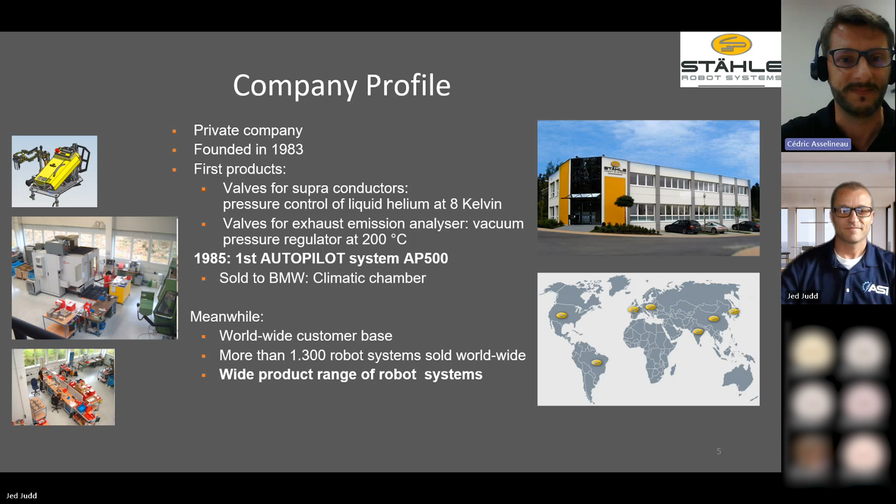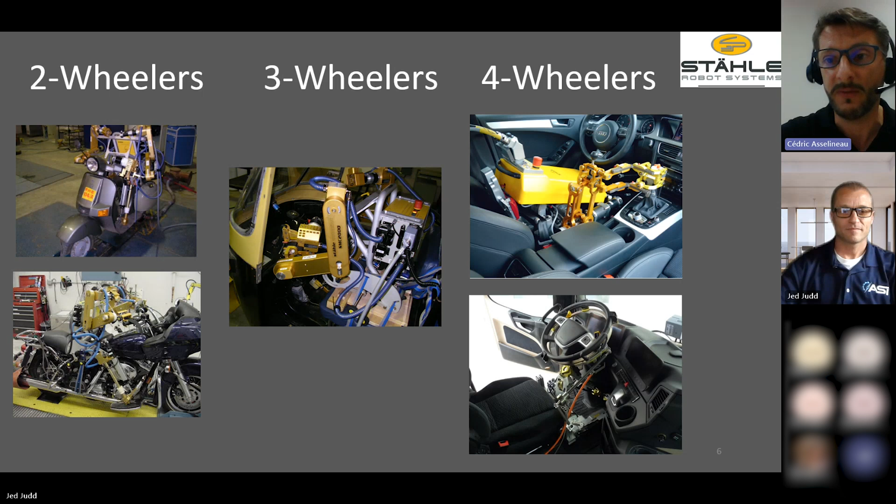So what we do is robots for any kind of vehicle - two-wheelers, three-wheelers like in South Asia, and four-wheelers of every kind of size. For the presentation today, we are just looking at four-wheelers. And I will jump into Jed's presentation when we come to the installation of a robot for the proving ground.

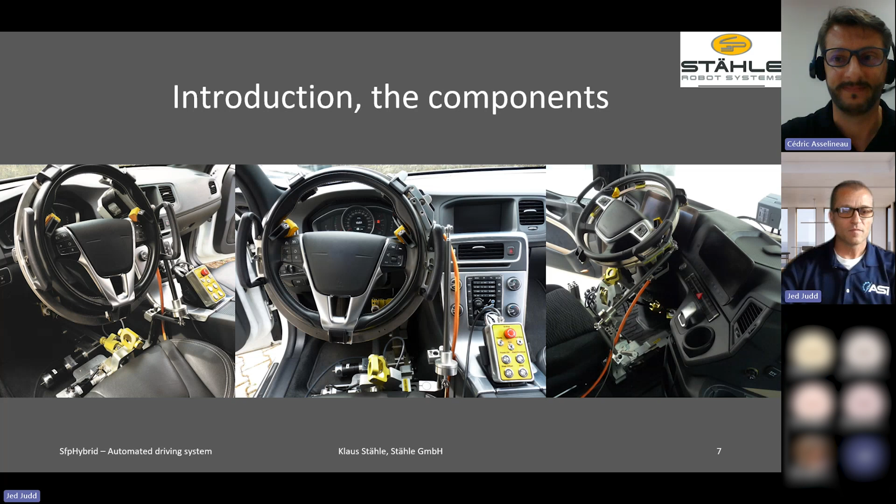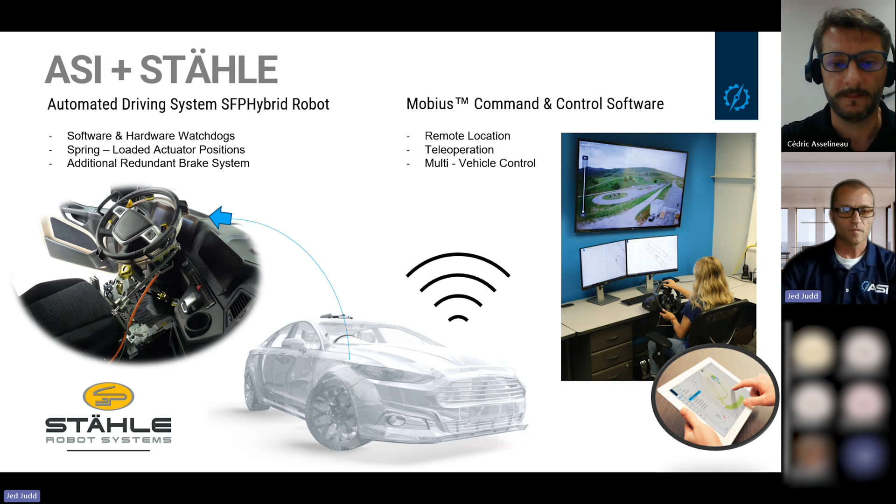Okay, well, yes, thank you for that introduction. So with ASI and Stähle offers software and hardware watchdogs. They've got spring-loaded actuator positions, additional redundant brake systems, and ASI offers Mobius with advanced safety watchdogs again, operating from a remote location. It offers teleoperation capabilities and especially multiple vehicle control. So together, ASI and Stähle provide advanced robotic solutions with ASI's comprehensive Mobius software platform.

And with this, the Stähle robot will ensure consistent error-free testing execution. Mobius software provides the analytics and real-time monitoring, giving you increased data insights. We streamline the processes and reduce development time and cost to accelerate vehicle development. The automated systems optimize operational workflow that increases efficiency. You will benefit from the solution compatible with any vehicle manufacturer, ensuring flexibility and broad application.

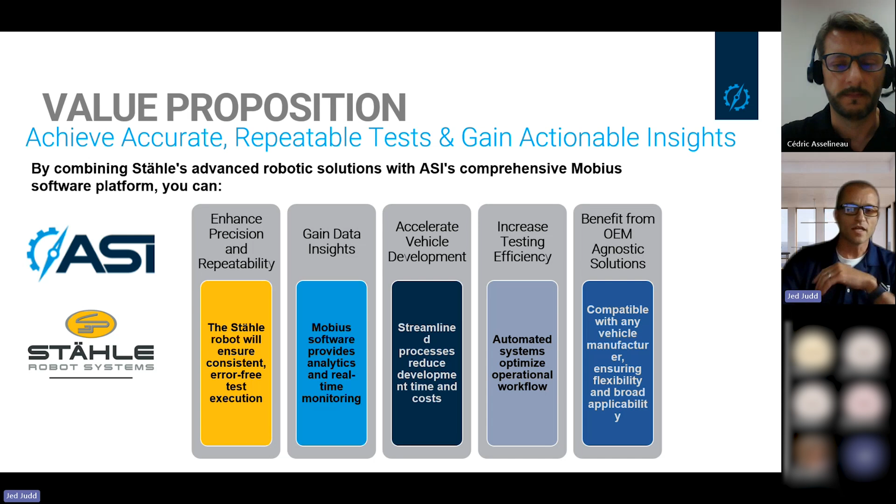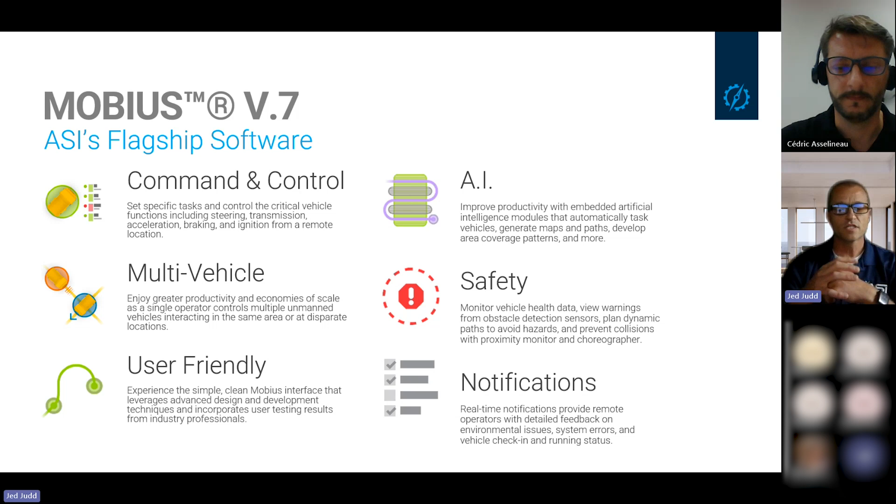With Mobius, it is our flagship command and control software. It expands human capabilities to commanding multiple vehicles in a user-friendly way with built-in AI to help you improve productivity and tasking vehicles. We've got real-time notifications and vehicle monitoring that helps keep your staff, facilities, and vehicles safe as you are running the tests. Together, both ASI and Stähle have automated commercial and passenger vehicles on proving grounds around the globe. From semi-trucks to trolleys, we've got you covered.

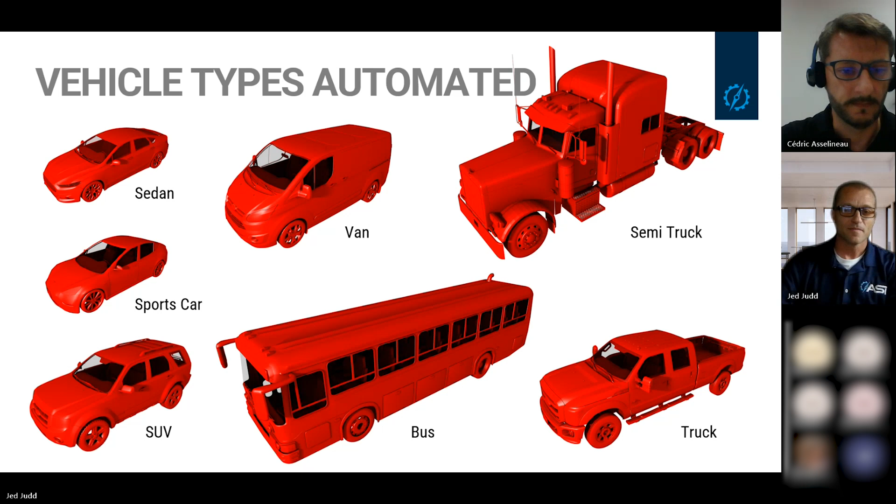Cedric, why don't you tell us a little bit more about your setup? Yes. Well, actually, when you look at all these types of vehicles of different sizes, you can think, how can you put a robot for every single vehicle? And what we have is one robot that you can use for all these machines without drilling or without using a tension belt. The common point you have with every vehicle so far is the seat rail. You always have a seat rail underneath your driver's seat.

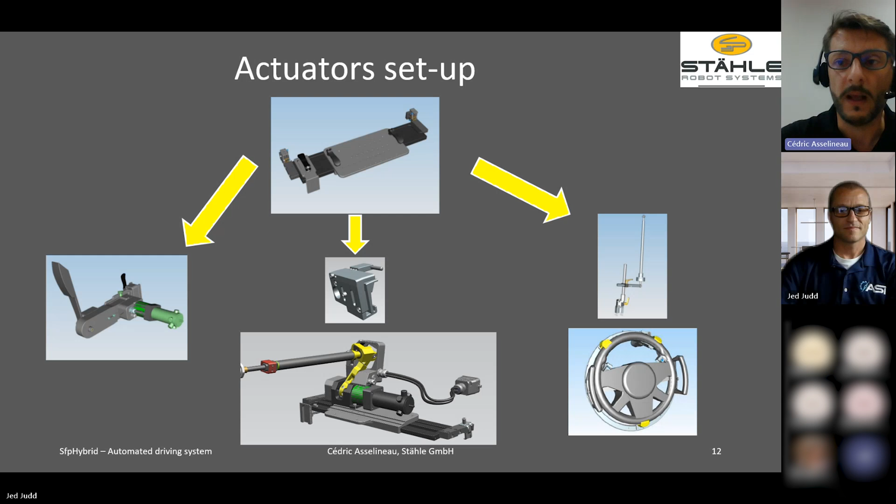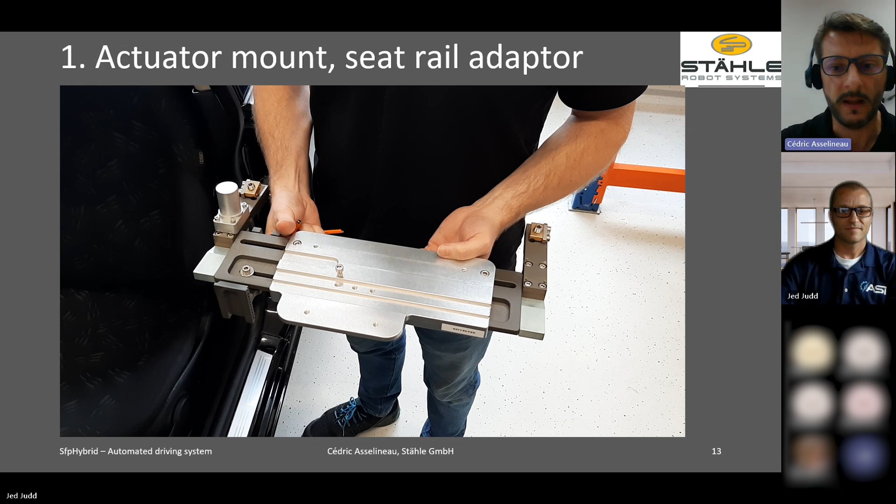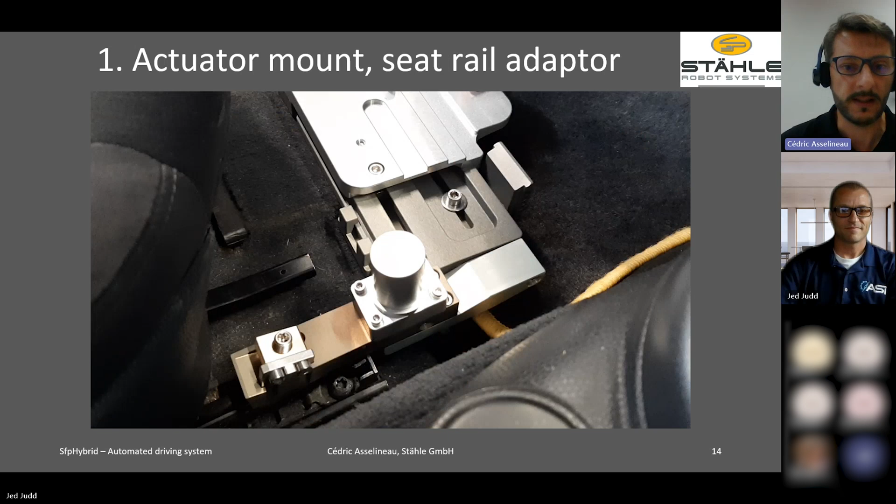And the few videos I have on the next slide are about a Mini made by BMW. It's a really small car. And on the video, you can see my colleague with this seat rail adapter and a wrench in his hand. So actually he just moved the driver's seat a little bit to the back so he can access the seat rail, and then with a hook which is linked with a screw, you can tie it on both sides. So you have to tie it on one side. On the next slide you can see the second screw on.

And you can also notice on the seat rail adapter that you have a lot of different holes and shapes. It's actually a really flexible system. You can adapt whatever you have for width, and then you can have access to a lot of different actuators we have in the portfolio. But here, for the sake of this video, we just take some standard elements. So now you have already your anchoring system, which is already fixed, it's very sturdy, and you have a low gravity point because you're just on the floor, on the carpet of your vehicle. So then you just need to snap one actuator with the other. The first one would be the throttle actuator.

So sorry for the sound, sometimes the sound is coming. It was in the factory.